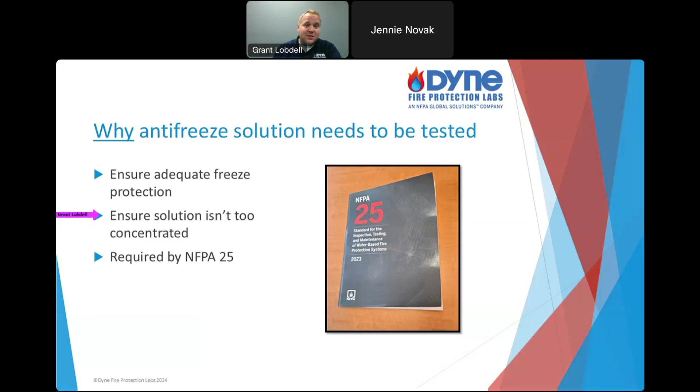Now, when are you going to do it? So now you understand why we're doing it. When are we going to do this? In NFPA 25, and it's been like this for several editions, you're going to always check that annually. And normally that's going to be at the onset of freezing conditions. I think in the most recent edition, they added this phrase, toward the beginning of the heating season. What they're trying to get at with all this phrasing is really just before you're going to need it, make sure you test it, right? So do it annually, but don't do it in the middle of summer. You're not going to need it until the fall. Here in Minnesota, maybe sooner than other people, but make sure you test it before it's actually going to be put through its paces. So every year we're going to get it tested.

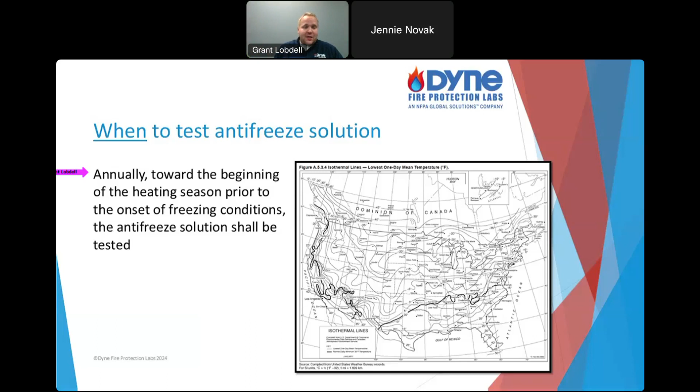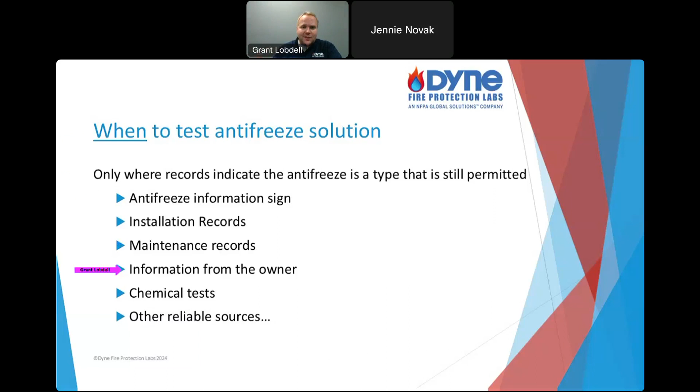Now, with one caveat, I'm still on when to test it. You're only going to test it if your records indicate it's a type that is still permitted. I've talked about the editions, things have changed over the years. If you look at your records, whether that be the antifreeze information sign, maintenance records, even info from the owner, no, we put ethylene glycol in there. Okay, that's no longer allowed. No point in testing it then. You're not required to test it then. If you already know it's not going to be acceptable, you do not need to test. So you're going to test it every year if the records indicate this is potentially something that is still allowed in the NFPA standards.

So we know why we've got to test it. We've got to have freeze protection, but we can't be too combustible. We know when we're going to do it. We're going to do it every year before we need it, before that freezing season, if the records still indicate it needs to be done.

Now, how do I go about testing, and how do I go about taking my sample? Let's start there. All right, so NFPA does provide clear guidelines on where we're supposed to take a sample. And you're always, no matter what, going to take from the top and the bottom of your system. Why are we doing that? I talked about before, things can happen to antifreeze solution as it sits in your system. Again, I could have some dilution, or I could have some separating out of the antifreeze itself, the glycerin, the propylene glycol in the water.

If that separates out, they're going to form little pockets of propylene glycol concentrate, and then the water, which is less dense, is going to sit up top. So if I take a top and bottom, I'm going to identify those separation issues. If the top and bottom are the same, great. It's uniform throughout, hopefully. That's a good indicator. But if I take the top and bottom, and the top looks like water and the bottom is all of a sudden really concentrated, oh, we've got an issue where it separates out of solution. So that's why at minimum we're going to take the top and bottom.

We're going to take the most remote. Generally, this would probably be your top sample. And we're also going to take a water supply connection if, again, it's not in that top and bottom. So generally, your water supply is your bottom. So in a lot of cases, we're just taking that top and bottom. But if for some reason the top of your system isn't the most remote, or the bottom isn't the water supply, you are expected to make sure all 4 of these are represented in your sample set that you send to us. So again, most remote, we want to make sure when we filled the system all the way at the end, it did get adequate freeze protection.

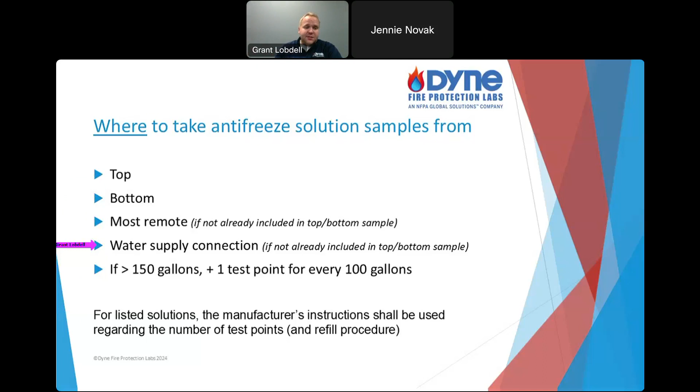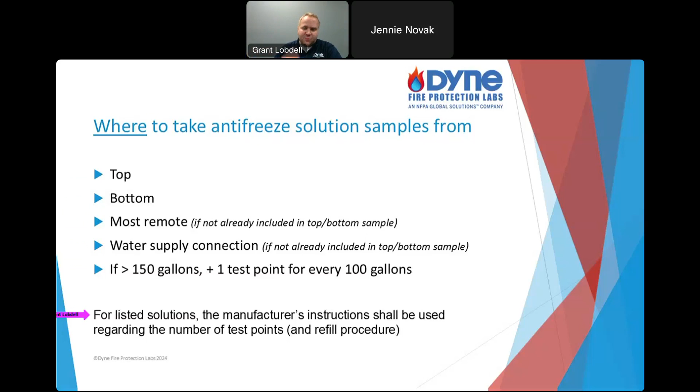Another exception in the code, and this has come in more recent ones, now that we have listed solutions, and we'll get into listed solutions in a bit. But if you have a listed solution specifically, you're going to follow the manufacturer's instructions as well. So NFPA is always the minimum requirements. These listed solutions may come with additional requirements from the manufacturer. From my experience, most of them are just following NFPA 25. You look at the inspection, testing, and maintenance section in their data sheet. Typically, it'll reference pretty much the same as what 25 has, but you always want to consult that when you can.

So again, I always like to start back from the beginning, reset ourselves. We talked about why we need to test it, when we've got to do it, where we're going to grab our samples. So now we've got our samples, great. Now what are we going to do with them? How do we do this test? And this is something that can actually be done in the field if you have the equipment.

Most people do choose to utilize a lab. One, they don't have the equipment, don't want to keep it calibrated, don't understand it, or just want us to take on that liability of it. That's what we're here for. We do offer that. But you can do this in the field if you have the equipment.

You're going to need to check the specific gravity. You can think of that also as density, or the refractive index. That's how it's worded in the standard. Here at the lab, we're going to check both, and I'll get into that in a moment of why we do. But you're going to check both, and you're going to compare it to what it needs to be.

Now, if you have a legacy antifreeze solution, this is what I'm calling anything that was never listed, right? It was before September 2022, it's never been listed. This is what everyone used for many, many years. I'm just gonna call that legacy. This is your simple glycerin or propylene glycol and water.

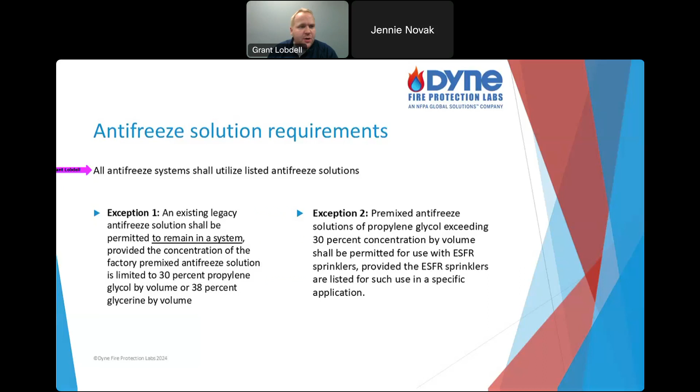Before I go on, I wanted to share my screen again, because I get this question, and it's good for us every year to look it up. So, listed, what products are listed? UL is an example of a listing agency. It doesn't specifically say in 25 that it has to be listed by UL. There are some documents that say it has to be listed by UL. But from my knowledge right now, it's a UL listing.

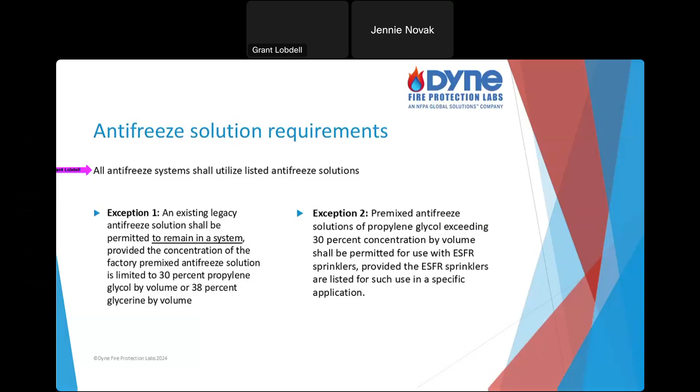And then, okay, so our requirements, we know what we have. Either we've got a listed product and it still meets the product data sheet, great, that can remain in service. Or I have a legacy solution that can remain in there if it's below that 30% propylene glycol, 38% glycerin. What happens if not? What if I think I have listed, but it doesn't match what the data sheet says, or I know I have legacy and it's too concentrated, or it's too dilute, it's acceptable, but it doesn't give me the freeze protection I want? What are you gonna do?

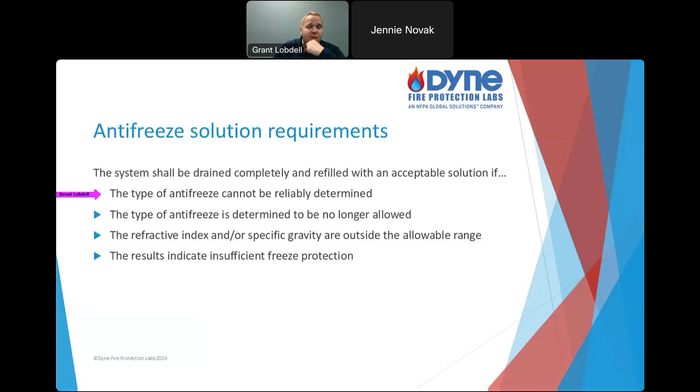Well, in that case, you do need to drain the system and then refill with an acceptable solution. At this point, once you put something in, you are going to have to use listed solution. And that is on any edition you have: 2017, 2020, and after 2022, you need listed solution. Or if we can't determine it at all, you don't know what it is, records don't know what it is, you send it to us and it does not match any product we know of, then you're going to have to replace it. I talked about ethylene glycol. That's no longer allowed outside the ranges.

So let's just take it back to square one again to ground ourselves. We're going to test antifreeze solution because we need to know it's going to provide that freeze protection we need. But antifreeze itself is combustible or ignitable, so we've got to make sure it's not too concentrated. So that's why we're going to test it. And yes, of course, it is a requirement, but there's a reason why it's a requirement. Things can settle, things can get diluted. Someone could do something to the system you don't know about, and it no longer contains any antifreeze. That's why we're going to do it.

When are we going to do it? We're going to do it every year before we need it, before that freezing season when we start needing heating. So that's why we do this webinar at this time of year. This is about when, for a lot of parts of the country, you're going to go out and start taking those antifreeze samples if you have them. Again, antifreeze solution is just one mechanism you have to address the freezing problem.

So we know when we're going to do it. We look at the records and we go, yeah, this does look like it's still allowed. Let's get it tested. At that point, if it's not allowed, you've got to replace, and you'd have to replace with listed. If we think it's still allowed, we're going to take samples at the top and bottom, and then the water supply and most remote, if that's not the top and bottom. And if it's a large system, we're going to take a couple more, every 100 gallons. So I got my samples, and then you're going to do it in the field with these meters, either a refractometer or a specific gravity hydrometer, something to measure that.

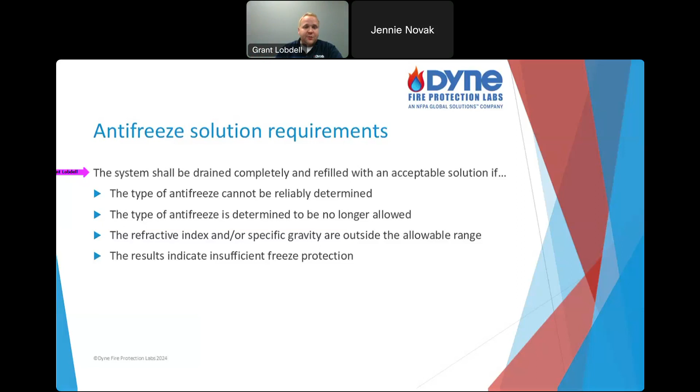Can listed antifreeze be used outside of its size limitations? Yeah, that's a good question too. Let me show you again. Hopefully I left it up. Here I'm just showing the last one I had up, which was LFP+. They talk about different applications, like if we take NFPA 13 design criteria, it's listed for less than or equal to a 40-gallon system. For some of you, you got a bigger system, you want to use this. In the 2023 edition, let's pull that up.

Where used to replace a legacy solution, listed shall be permitted to be used outside that limitation, provided the temperature range is not exceeded, which makes sense, right? You can't go outside the temperature range, it's going to freeze and cause you problems, but they are allowing a caveat. That's right in the 2023 edition. If you have a 50-gallon system, they are allowing you to use it outside the listing for now. I think they understand that, hey, we only have a couple products.

Right now, they've only been tested up to a certain amount. We can allow that exception. So that's a good question that is in the document. I think in time, maybe those may get bigger.

The freeze point is the freeze point. Again, you can't put it in. If you only go down to -10 and you need -20, this just isn't a solution for you anymore. Maybe there used to be more concentrated glycerine solutions in the past that would work for you. But this is what we have today to still meet, again, that listing. That listing has evaluated, again, that potential risk of it fueling the fire, and there are certain limits to meet that standard that it has to hit.

No more buckets and tarps. No more water or smell. No more hassle. The DropMaster DM12 makes replacing sprinklers easy. After draining your sprinkler system, simply connect the DM12 to your drain and wait for the system to get to vacuum before proceeding with your removal of sprinklers. The air pulled through the sprinkler system by the DM12 and the vacuum it creates will carry trapped water with it. The pump inside the DM12 will then discharge the collected water where you want it. When done for the day, drain any remaining water in the drum. Drain any oil collected from the muffler. Top off the oil in the vacuum head reservoir and clean the Y strainer basket on the suction line. This will ensure your DM12 remains in good working order and is ready to go for the next job. And built to last right here in the United States. The DropMaster DM12 will quickly become one of your favorite tools. Order yours today. Contact Dyne Fire Protection Labs for current pricing information and lead times. Parts and repair services are also available.

So if you haven't ever seen that product before, maybe it's eye-opening, but that can help you take sprinklers down without the mess. And in this case, with antifreeze, if you're trying to drain all those drops, you still have to pull the sprinkler, but the air going by would take the liquid with it. Just in this case, we probably wouldn't put that on the ground, right? We'd probably capture that. You'd take that discharge line and put it in a tote or whatever you've got to capture it in. Again, always follow state and local regulations there.